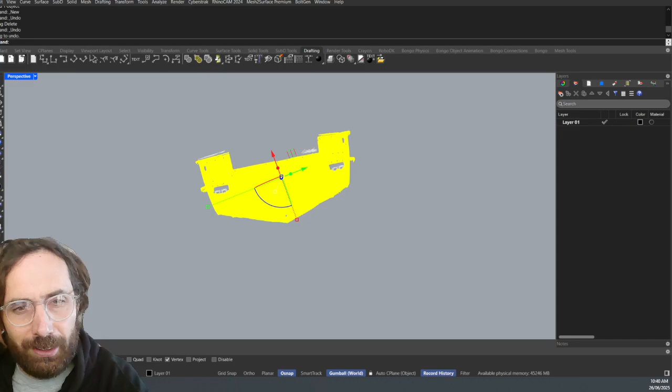So I'll make my image a bit smaller. I just figured out how to do that. There we go, maybe you don't need to see me at all. I don't know, I'll go really small. Maybe I'll just disappear altogether. There we go, how about over here?

Yeah okay, so let's get into it. Right, so the scans just come in. Is it aligned? It's not aligned in any direction.

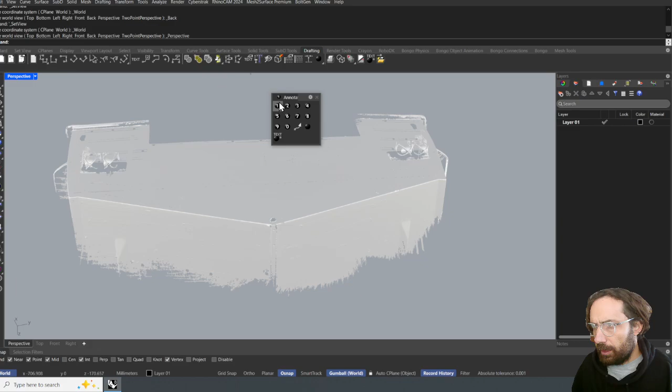So what we're going to do first is my old 3-point alignment trick. Now I have a video just on this, but I'll go through it with you. So we go drafting tab, we get these annotation dots, and we find what we think are 3 flat areas on the scan, snapping to vertex.

Then we select the whole thing, and look, I normally type this kind of thing in, but let me see if I can find it in the help menu, and we'll also get the help happening over here dynamically so you can see what command I'm using. There we go.

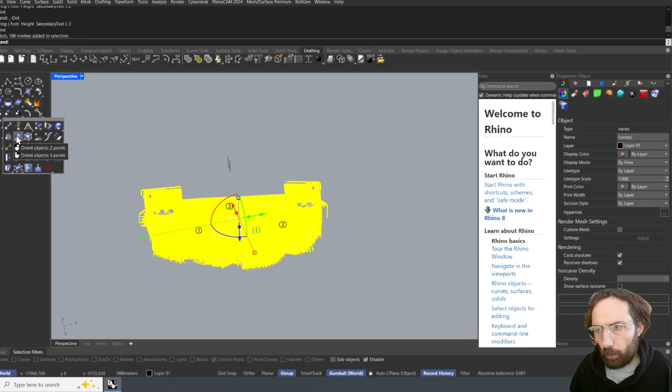Right, so I'm pretty sure it's in the transform, and it's orient objects on surface. It's this one, orient 3-point, right click. So orient 3-point, and we want to snap to points. Points, there we go. 1, 2, 3.

Now we'll go into front view. Well look, it's the back of the boat. I normally like to align things front to front, back to back, but because this is the whole job, we'll go front view. So now you select the project.

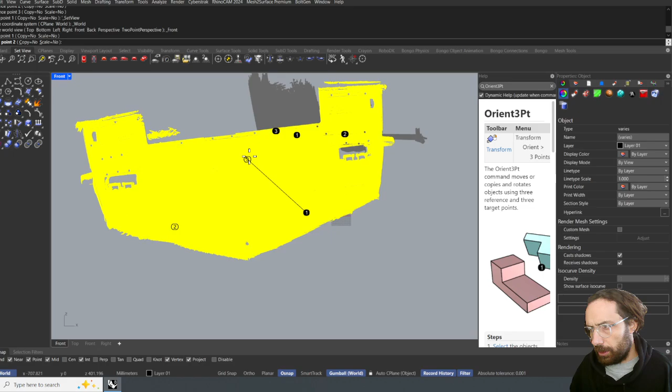This means we're projecting those 3 points onto the construction plane. So, point 1, target point 2, I think it should be over here. This will make sense in a minute, and target point 3 there.

Okay, now hopefully that back plane, the computer's just processing for a second. Hopefully that back plane is going to be completely flat to the back of the transom. The fact that it's rotated at that weird angle is no big deal, because we can do a gumball rotation.

Well, it's still processing, just processing that movement. And while that's happening, we can't do anything, just gotta wait. I'm gonna pause. Okay, we're good.

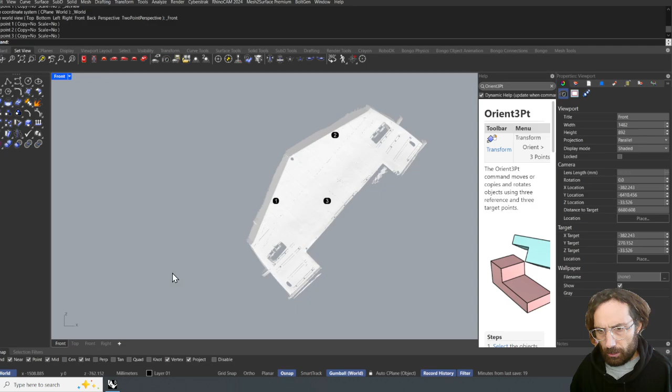So that's taken place, and now what we're gonna do is we'll use the rotate command, rotate 2D. Select the object to rotate. We'll click on the mesh. Okay, we've got selection filters. There we go, so we'll click on the mesh, and actually we'll box select everything.

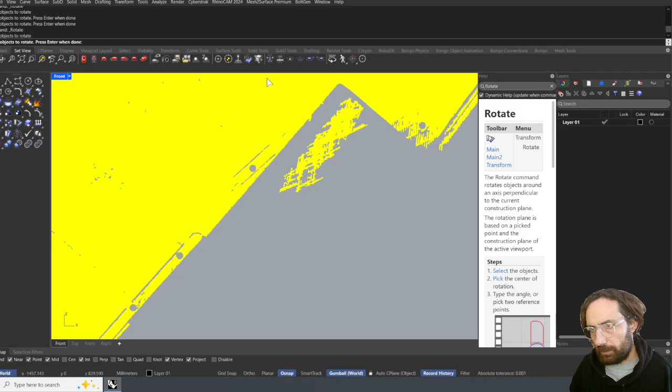Rotate 2D. Select objects to rotate, press enter. Okay, I'm going to press spacebar because I'm a rebel. Alright, and pick 1 point there and 1 point there. And now I'm going to rotate it around. I'm going to press the tab key and snap to straight plane. Okay, so now we have the back of the boat looking close to how we want it to be. Just let the computer think for a second.

I think okay, so we'll select all this again, and I'm gonna get the move tool, and I'm gonna click on that point there, and I'm gonna type in 0, 0, 0. Press enter, and now that scan has moved to the origin point of the file.

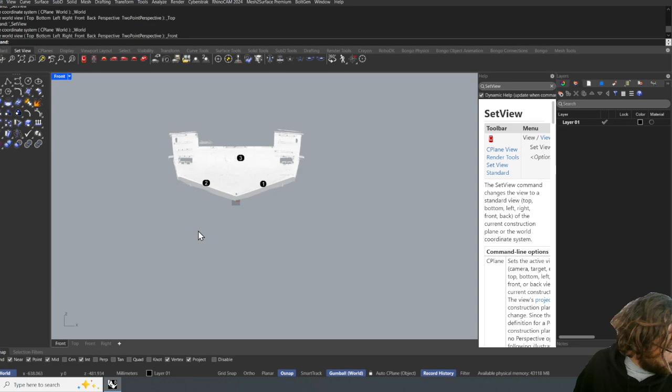Okay, so that's been moved, and now we have a look in top view, and we can see it's relatively straight. Front view looks as though I might have gotten it the wrong way around, so that's fine though, because most importantly it's flat. So I'll select everything and gumball 180 degrees.

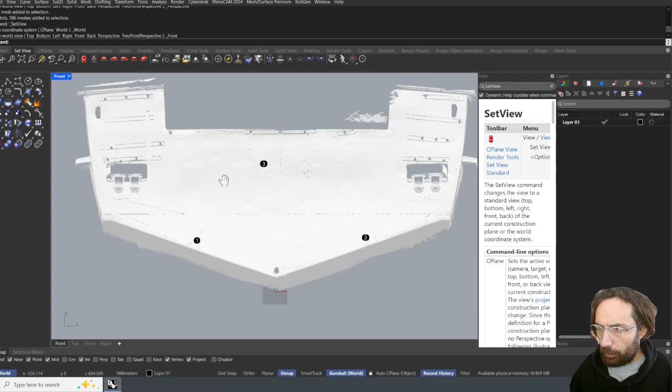Just let the computer do that. Now, why is the computer taking so long to perform these operations? It's because the mesh is quite large and it has a lot of vertices and mesh wires to move every time. So let's take a look at this.

So how do we assess how large the mesh is? We click on the mesh and run the command reduce mesh. Look, even if you're not going to reduce the mesh, this is a great tool because it tells you how many polygons are in your mesh. And as you can see, there are 5,606,865 polygons. Now, that's a lot.

So every time we move it, my computer is moving 5.5 million points of data. So that's a lot. Look, a scan like this, really, it could be under 1 million. So we're going to click on reduce by percentage, and I'm going to write in 75%. Maybe we'll even go 80%.

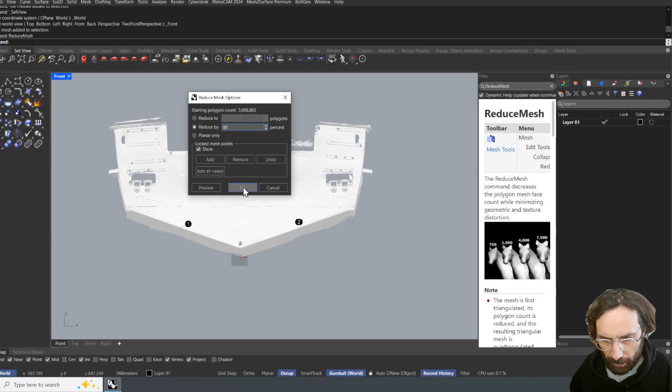1.1 million. The only problem is this is going to process for a while, but I'm going to hit OK, and then I might just pause the video while that processes.

Hey, just checking in, unpausing the video, we're at 16%. So we'll keep going. You can see up here in the top left corner, it gives you a percentage bar. When that reaches 100%, well, it isn't over because it tends to take another minute or two.

There are other programs you can use to reduce the mesh that are quicker. But Rhino does a good job, and it just takes a bit longer.

So we're at 85%, and I got a bit cold while we were waiting, but I thought perhaps we could just review this together, which is basically the Rhino help file.

This is the option we did, reduce by percent, which specifies a reduction by a percentage of the starting polygon count. Locked mesh points - reduce mesh lets you lock mesh points, and reduction will not alter those points. Oh, I didn't know that.

So you can actually add points that you don't want to be reduced. Well, that's pretty interesting, we should have a play around with that. Oh, and there's accuracy. This is very interesting - to access hidden command line options, type a hyphen in front of the command name. Well, isn't that interesting?

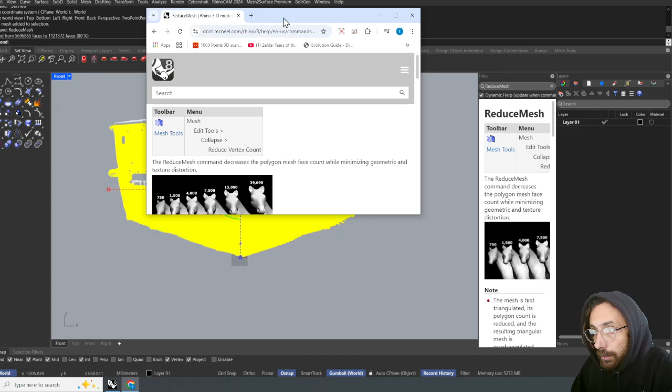Well, it's done. You can see it's highlighted yellow, that means the mesh reduction is complete. I'll click off. Now, if we run the command again, you can see we're at 1 million points, which is a fair bit better.

Now I'm curious about that. So, reduce mesh, and then what do we do? A hyphen. Oh, it tells us over here - reduce mesh. Okay, so now we type a hyphen in front of the command. Oh no, in front of, like, before the command. Okay, sorry, I'm being a bit of a beginner here.

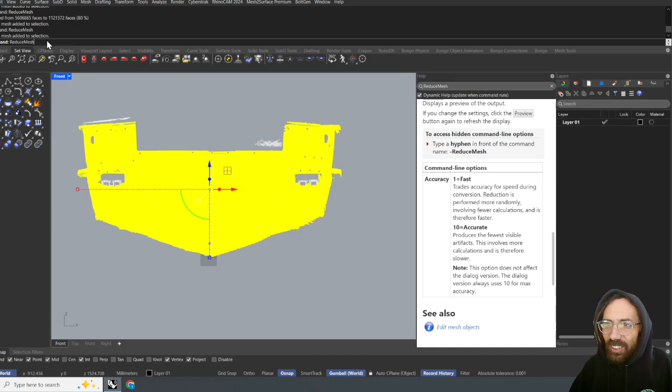Okay, hang on. Oh no, I've nudged the mesh. Uh-oh. I do this for a living, don't worry. Okay, reduce mesh.

Oh, okay, look, so now we've got mesh reduction options, accuracy 10. So we're on accuracy 10, which involves more calculations and is therefore slower. So what if we just go to 1? We can undo this, but let's choose okay. Right, now I'll press enter again, preparing mesh reduction.

Okay, well that count's going a lot faster. But I don't know what - oh, reduction percentage 0. Oh wow, isn't this interesting?

Sorry, this is not very good content, is it? But at least we're learning something together. At least I'm learning something. That's what I love about Rhino - there's so many commands, there's commands under commands under commands.

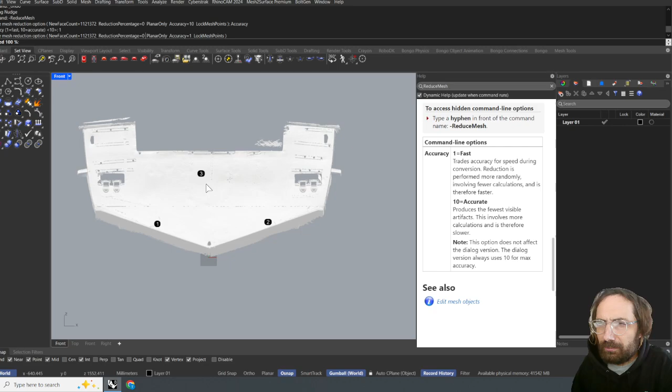Alright, we're at 100. And let's just run the command again to see what our - oh geez, we're at 224,274 points. Well, I'm a little bit nervous that we might have reduced the mesh too much, so what you can do in this instance is press Ctrl Z and visually check for any big changes.

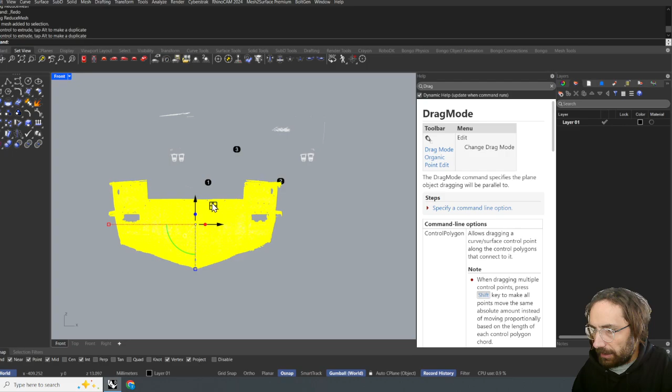Okay, that's before. After, no changes, I think we're fine. Now if we zoom in on the mesh itself, we can see we've somewhat pixelated it, but I'm thinking now we can just whiz the thing around with barely any calculation time.

So I'm going to press Ctrl Z, Ctrl Z, Ctrl Z, Ctrl Z, and again. And look, I might just undo that last reduce mesh because I don't want it to be too much reduced, and I prefer the look of that.

Okay, so we'll run the command reduce mesh one more time. And we're at 224,000, which is, yeah, it's reasonable. Look, I think that would be okay for this job.

Okay, so now we do the process of straightening up. In this view it looks okay. What I sometimes do is make a new layer and make that layer red. And while we're on layers, we should really make this layer 1, we should call it 0 scan.

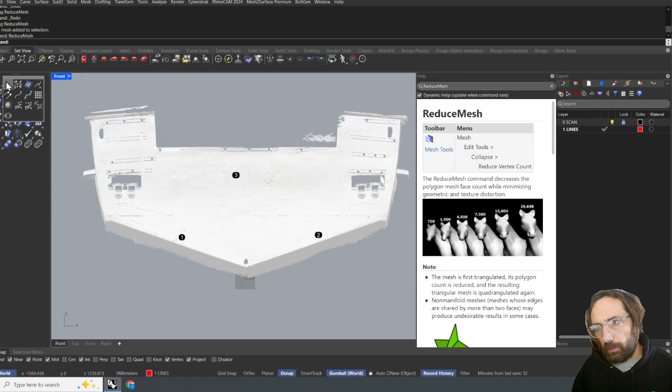There we go, and this layer can be 1 lines. But now, for want of a better term, we can lock a scan when we need to, which I just locked.

Right, and now I'm going to draw a line which is orthographic across the screen in the X direction with no deviation in the Z direction. So it's a straight line, and it's really important that we try and set the job up aligned with the X, Y, and Z plane, so that when we're extruding things, we're consistent with the geometry. So you can see from this line, I'm using the line to assess the straightness of this transom rebate here.

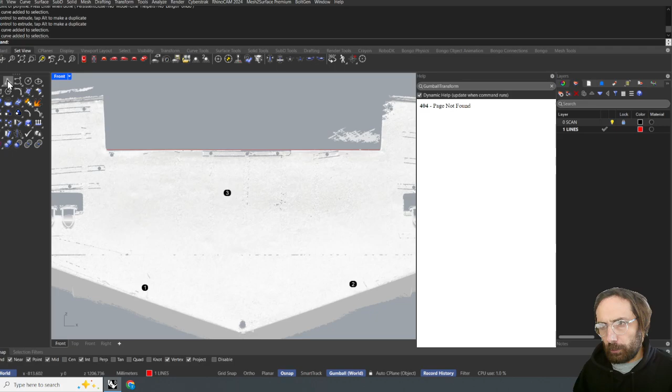Now you have to remember this was a handmade or hand-modified boat, most likely, so you have to start using your judgment. Not everything's going to be perfectly straight. For example, you look at the angle of this here against the angle of that there, I can see they're different, but that's where a bit of human judgment comes in.

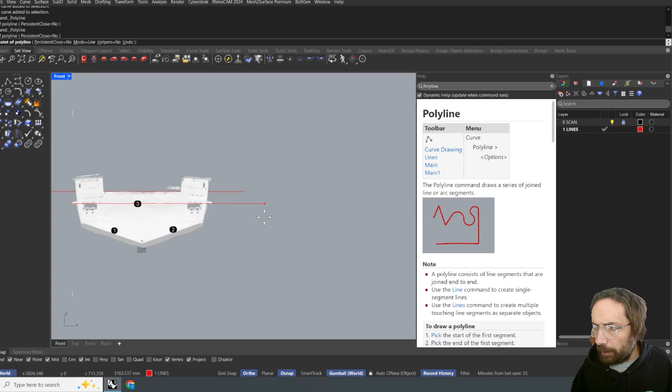Maybe we can assess these two as well. So if we go to, like, the bottom of that rad there, come straight across. I'm holding down the shift key and pressing tab, which means I can let go, and now this line is constrained along the X direction. And look, that looks like it's in about the same spot. That's pretty good. So in front view we're good.

So now I'm going to go top view. Right, and the same question, how straight along the X-axis is our mesh? So I can use the same line and find the line I want to assess against, which I'm going to use this bottom chine. And I'm just moving along.

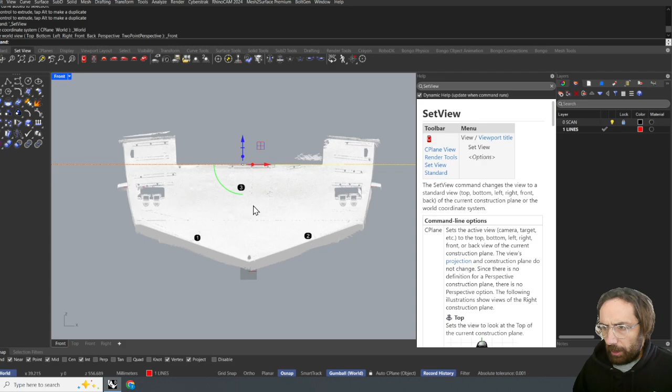It's really a decision-making process that the CAD operator has to do. It's something you got to decide. It's a decision that you have to make. A lot of people think that reverse engineering is like automatic. It's not. It's a chain of decisions, and each decision leads to another decision, and that's like the foundation.

So I'm just aligning the C-plane to this back point here. Each decision is the foundation of your later CAD work, and you can have a shaky foundation. Like I had a job recently where it had a twisted center line, and I aligned it somewhat offset, and we completed the job, but it caused a lot of unwarranted issues had I spent more time simply setting up the scan.

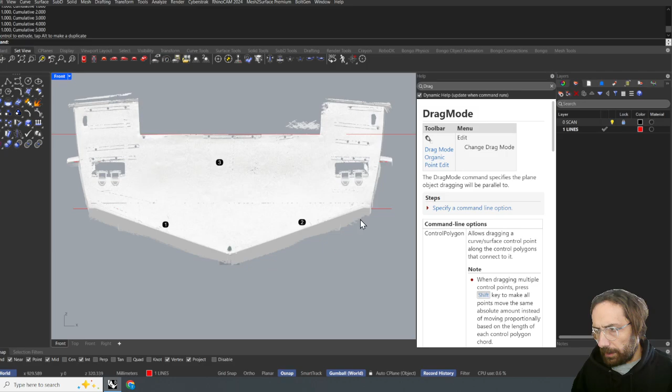Right, so I've just drawn a line across there, and I want to see it, so I'm pulling it that way. Okay, now I can see it, and typing in C-plane, I'm going to align my C-plane, turning off project, align my C-plane to there. So now when I draw another line, it's not going to be behind the mesh, because I want to mark a center line.

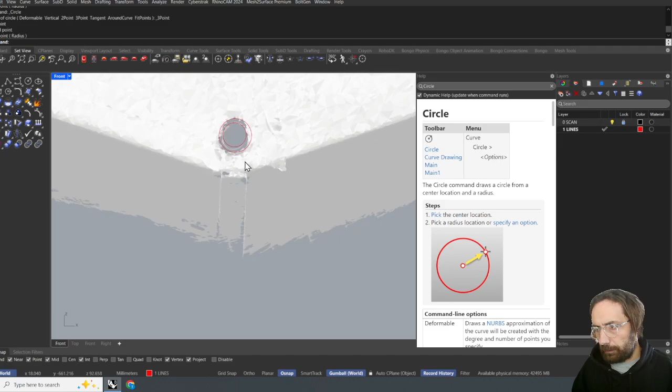So we've got a circle here, so I'm going to draw a 3-point circle. Wow, I don't think that's very good. I'll draw another one. We don't have a lot of data to go on, but again, this is where the judgment comes in. This is where the art of reverse engineering comes in.

We got a strip here, which is a keel strip. We can draw a line straight up there. I'm holding shift, so that line is perfectly aligned along the Z-axis.

Okay, now these guys, I'm going to use the concentric align centers, and I'm going to pop them on that line. And I'm using my arrow keys with a 0.1 increment and the nudge activated, which I'll show you how to activate because it's super helpful.

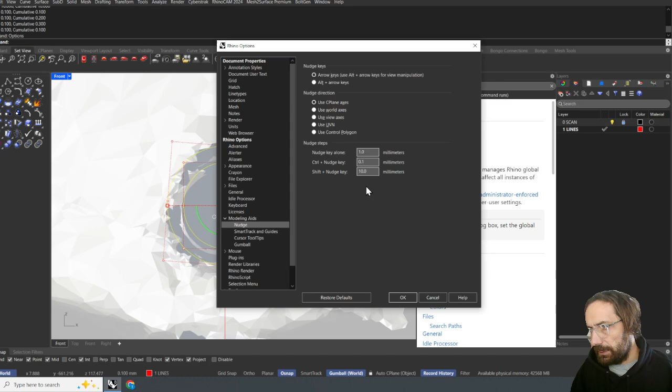So it's in modeling aids, nudge, and you can have your arrow keys set to these increments. See, I've got control and an arrow key is 0.1. Now this can also be a problem because you can accidentally move things, but it's a cool tool.

It's a great tool. So now what I'm curious about is I want to draw a line from here along the bottom of the hull to here. Now I'm going to mirror this, and hopefully they're about the same. And if they are, it's going to make... I'm going to turn off vertex snap, and I'm going to snap to this line. There we go.

Alright, look, we've got a bit of a misalignment there. So does this mean that my center line is out, or does the boat have a bit of an unusual shape on it?

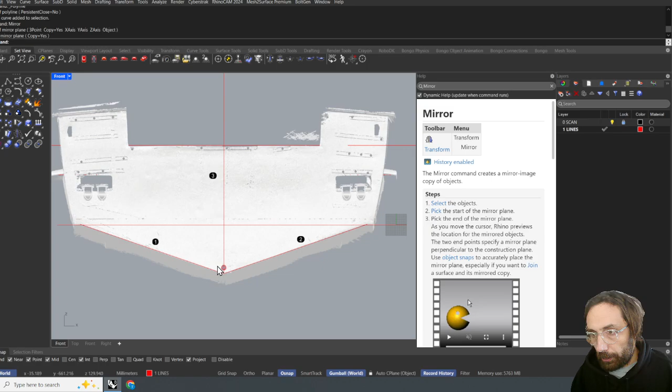That's kind of what we're going to look at. I'm going to go to drafting and take a measurement from here to where I think the actual end of the transom is, 4.89 millimeters. Now look, whereas on this one we're perfectly aligned, that's telling me that something on this real life object is not straight.

To be honest, in the real world, when you're dealing with scan data and real world objects, the challenge is you're trying to draw CAD on them, and objects in the real world are naturally going to be bent out of shape by physical forces, whereas in CAD everything wants to be perfect.

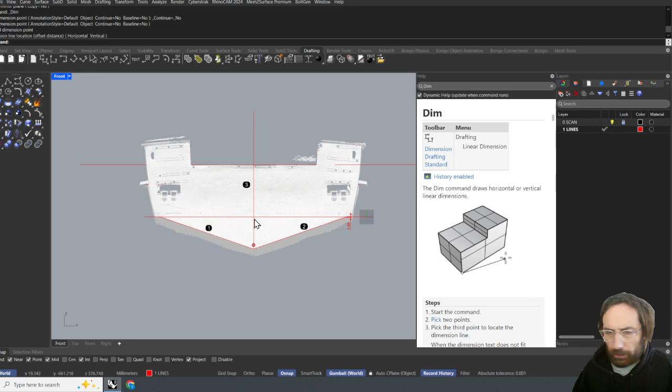That again is the game of reverse engineering. It's trying to align those two, and if you have a physical output, which reverse engineering typically will have, the challenge is weaving between the perfection of the digital and the imperfection of the scan, which represents the real world, and trying to shoot a line through the middle. It's a constant decision-making process.

So what do we do here? I'm wondering if we should rotate the hull a touch so these are more aligned, because at the end of the day we're going to be making a pod that goes on the back here. So I'll find another line to check, which I think will do a 3-point arc along here.

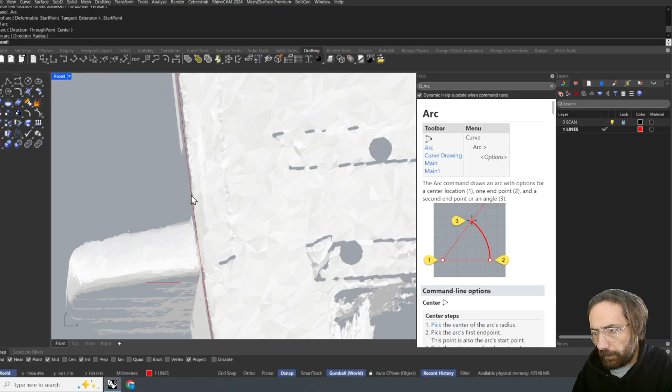It could be that my center line is out too, it's hard to say at this stage. This is the investigation phase. So I've got a line here, click on the line, and I'm going to mirror it, using this here. Okay, it's slightly further over. Oh no, we're about the same. Let's check some measurements.

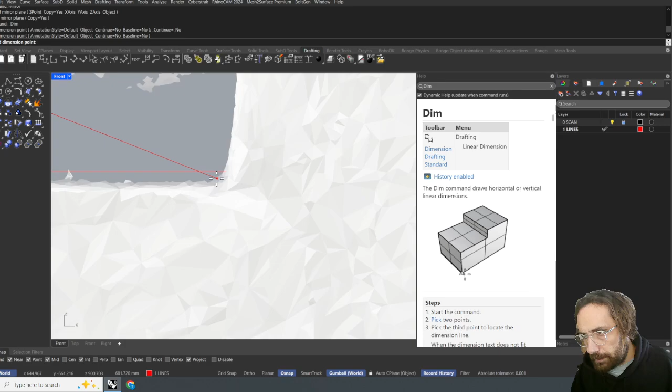Let's go a measurement from here to this bottom corner: 637.75. And we'll go from here to this bottom corner: 632. Right, now that's pretty interesting, so we're plus 5 mil there. Okay, so let's go from here to here.

1150, and we'll do the same, going from here to here: 1153. Okay, so this is interesting because we have a higher number here and a higher number here, which indicates a bit of a twist.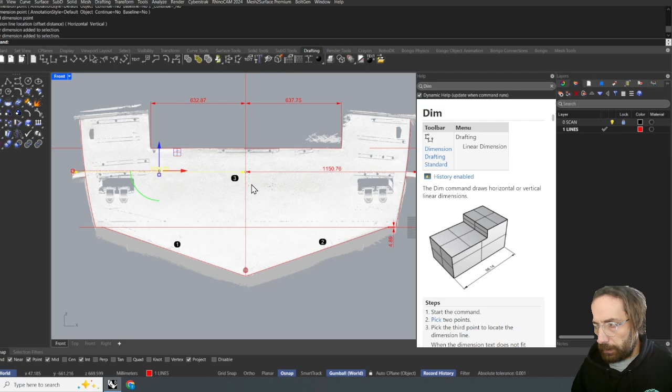That said, these planing strakes, I don't think they're really something we should be making critical measurements of. So we'll go again, from our perceived center line to this bottom corner: 999. And from this perceived center line to this bottom corner: 995.

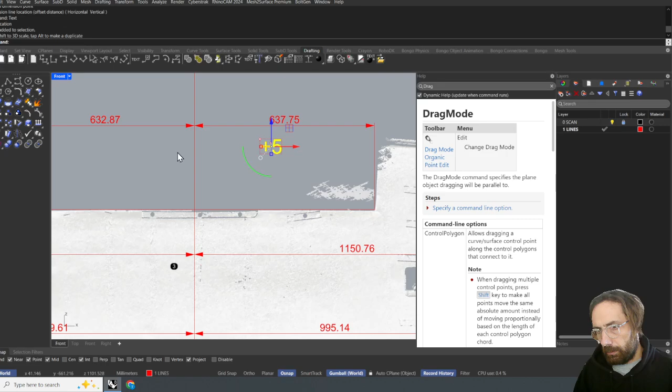Okay, so I'm going to bring up some text. I like doing this, I've got two monitors so sometimes the pop-ups go into the other monitor. Alright, I'm going to put a +5 here. This text, we use to mark it, we'll just round up to +5. Right, so we're +5 here.

Now we'll come down here, we are +4 here. So this one is 4 higher than that, and about 5 higher than that, so that's indicating a twist, which is, to be honest, typical for a boat.

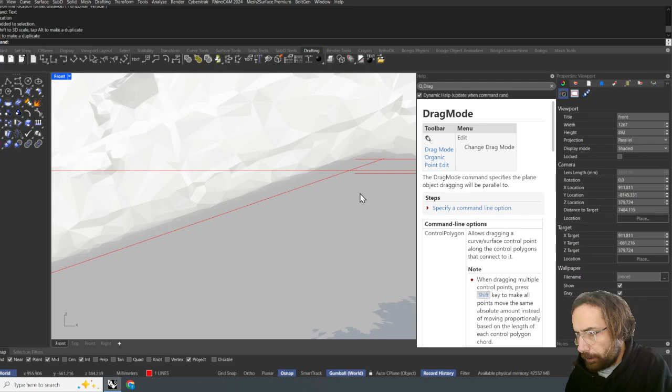Now, I have to build a transom extension kit. I don't want to build an asymmetric kit, so what do I do? Is my center line plumb? I'm thinking this is indicating that the boat, I don't have the boat set up completely plumb.

Or even if this line is, this is a line that's straight along X, so I guess there is a bit of a gap there, but it's touching there. It's touching, it's pretty consistent. Okay, I think I'm going to rotate the...

What happens if I rotate in this direction? This is the Crayon plugin, which I think the new Rhino 9 WIP actually has as a feature, I could be wrong. But then again, this plugin is $20 and it's just fantastic. It works with Grasshopper too. I haven't really... I don't know why it's disappearing. It's not working for me, but it's a good plugin normally.

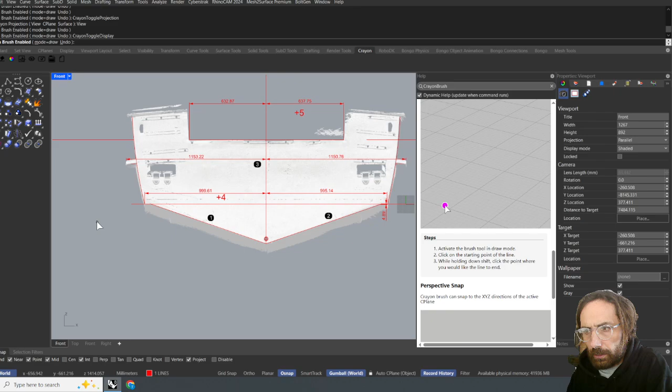Let's have a look: arrays, brush size, draw lines. I use it all the time, believe it or not, for client markups and whatnot. Don't know why it's... projection, view, toggle display. I don't know why it's not working. Okay, well alright, so +5, +4, which indicates that.

So we've got some decisions to make. We've got a center line, a perceived center line. I mean, yeah, it doesn't quite look right, does it?

Let's just double check that this line is in fact heading straight up plumb. So I'm going to click the ortho. Yep, that's a straight line. And let's just double check that this line is also pretty good. So it's in ortho, yeah, that's good.

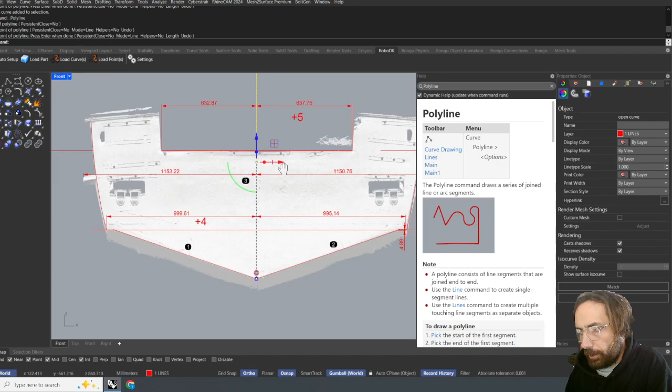So the issue is here, we use this to set up initially, whereas clearly we have a gap here and a high number here, so I'm thinking we might just rotate this mesh. So instead of clicking on the mesh, I'm going to type in 'SelMesh'.

SelMesh. Ah, I see, okay, so we've got a locked layer. There we go, SelMesh. Okay, and we'll group it.

Okay, and let's split the difference here. So what does 0.1 of a degree look like?

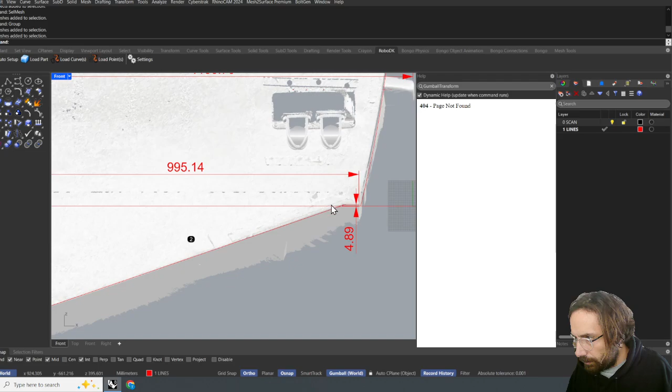That brought us a bit closer. Yeah. Okay, so 0.1 of a degree. Let's just redo this measurement.

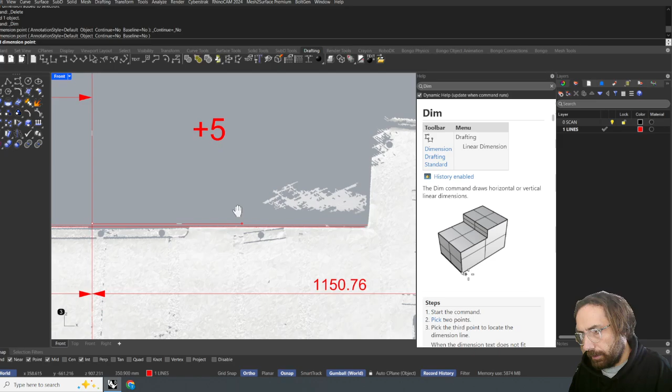From here, our center line to, let's say, well, it's hard to say, isn't it, there? 639. 634. Look, I should really take it from the vertical face. There we go. 638.

And we'll call it there, 642. 638 and 642. Yeah, we'll delete those two. Oops, I'll delete the center line. 642.

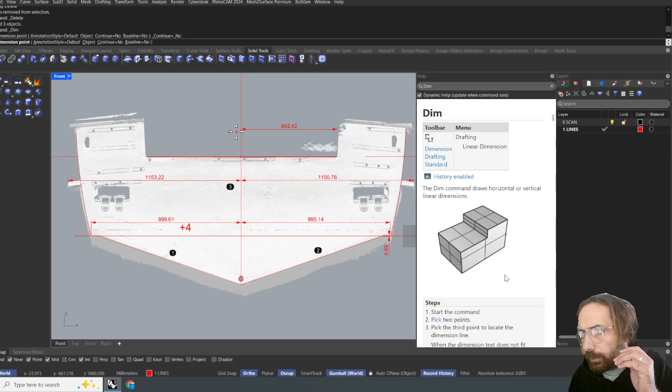637. Take another one. Call it there. 638. This is what scan data's like, you know, it's ambiguous. It's like 642. Okay, so 638, 642.

Right, we'll get rid of these dimensions. I think we'll go for this outer chime one again. We'll go to, can you tell that there about the radius point?

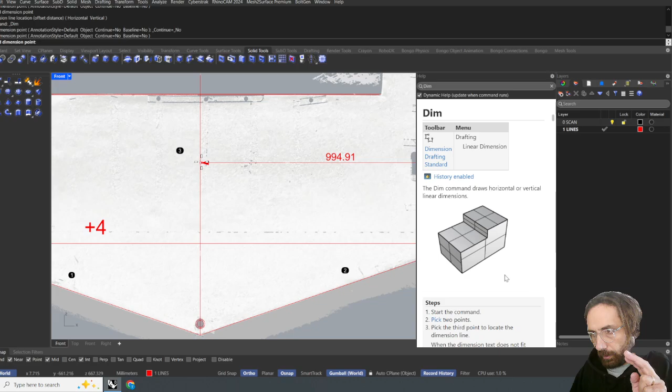994. Let's do this side. 999. Okay, so we're still plus 5, and we're still 9, 10, 1, 2, still plus 4. So that rotation didn't really change anything.

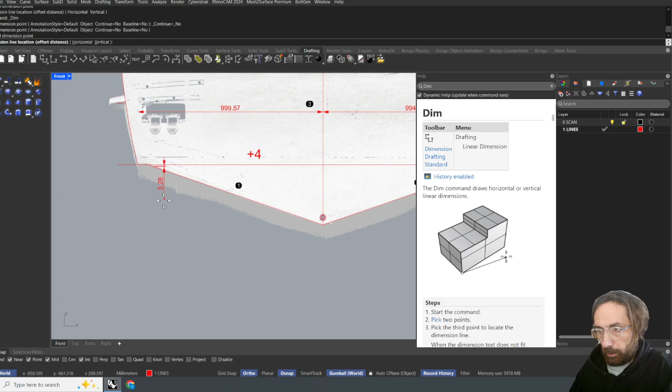Well, it did, but barely any. But what it's done is it's reduced our gap size down here. So you see, we used to have a 4.89. We'll get the drafting tool, we'll get a dimension from here to here, 3.31. Okay, let's have a look at this one. 3.28.

Look, I know this is precise, but at the same time you're going on feel. But this is just the initial setup. I want to reiterate that we're going to do more setup.

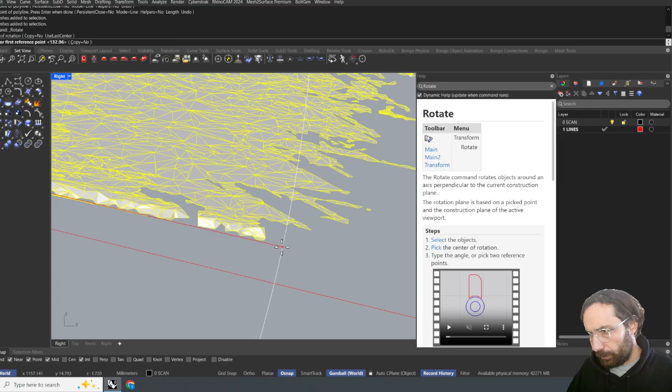So we'll take a look at this in side view now, and obviously it's heading downhill a little bit, so we'll sort that out too. I'm just going to select the mesh and run the rotate 2D command. Rotate from here to here and do an ortho snap shift. There we go. Okay, back to front view.

Now, because we're looking at it on a plane, it's basically the same, but we might just redo some of our measurements. So I'm going to type in SelDim, select dimensions, delete. And we'll get rid of that plus 4.

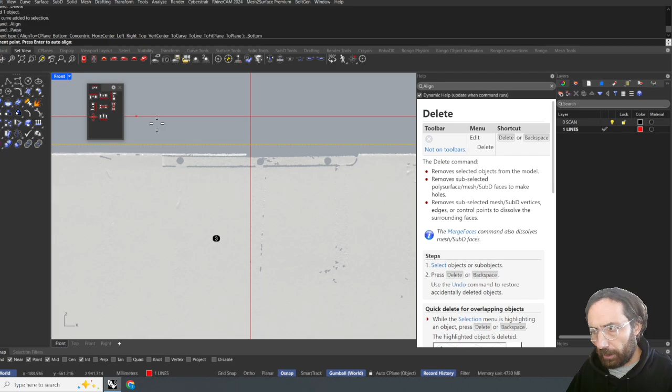We'll delete one of these lines, and using the align toolbar, bring the other one down to say about here. Visually inspect that line. Okay, still looking okay. This one, yep.

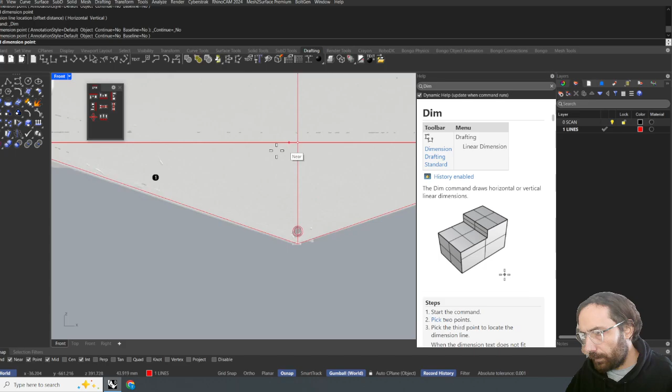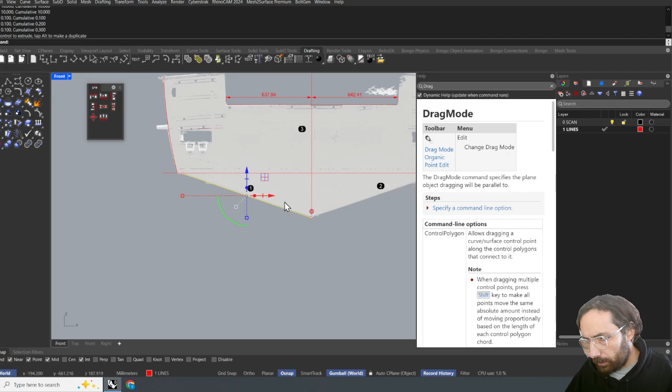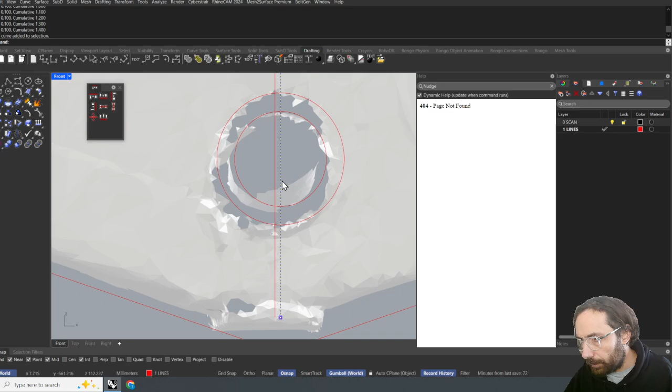Okay, and let's just have a look at our shape of our V. Okay, we'll mirror this off our selected center line. Okay, so that tells me the center line could potentially move over a touch. Control and arrow key. There we go. Mirror.

Okay, what's our distance here? Drafting... 1.73, 0.1, so we're about a millimeter out of alignment. We're more down here.

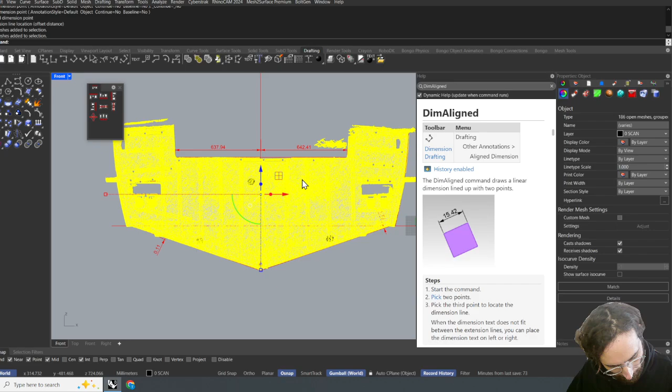Okay, so now sometimes at this point, as an extra check, I'm still just making my mind up about this, about the orientation of the scan. Sometimes what I do is I select the scan, I copy it in place, I take one of the scans and I change the color. I change it to, like, I don't know, red.

Okay, and then what I do, now they're both overlaid over each other, is I grab one and mirror it along the center line. And then I just have a look-see, see what I can see.

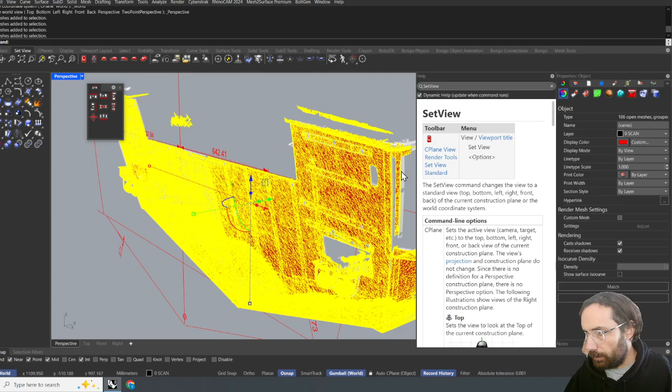Okay, did we change them both to red? No. Okay, so in the act of mirroring it, somehow we took it forward, so I'm just going to move it a little bit.

Alright, so this becomes quite interesting. So you can see these are reasonably well aligned, and if we look over here, you can see this is pretty well aligned. Well, that's a bit further over there. How are we looking over here?

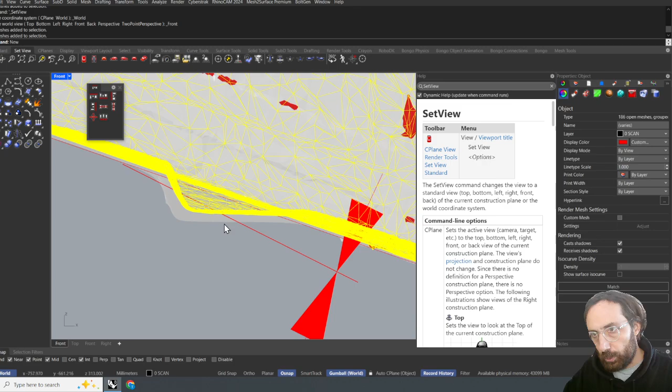Okay, what I sometimes do at this stage is I make a new floating viewport. There we go. And what I do is I pan over to the opposite side to where I'm looking.

Select everything, and again we're just making sure - look, they look pretty even to me. So I think that...

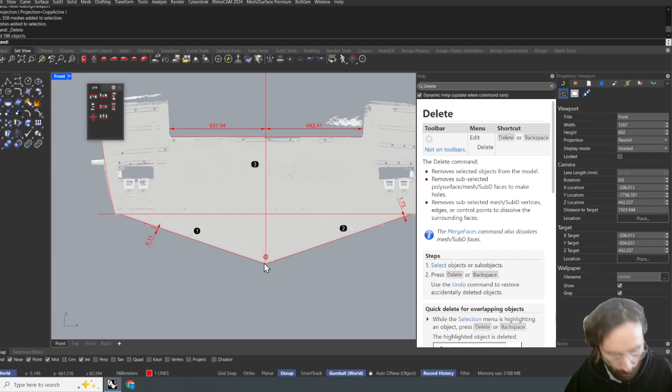I'm gonna have to say that I have this scan aligned enough to start work. I'm gonna delete the red one, which is the one we mirrored. In fact, I'm not even gonna delete it - I'm gonna Control Z just to be extra careful, back to before I mirrored it, and to before I duplicated it. There we go, so now we're back to just one scan. So there's no chance that I accidentally mirrored the wrong scan and now I'm working off a mirrored scan. I know I'm working off the correct scan.

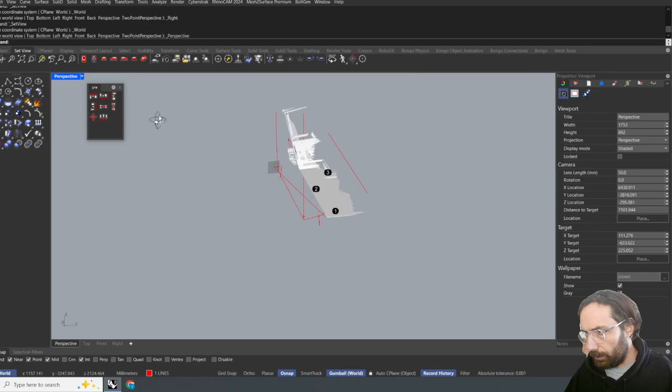At this point, for the overall tolerance of this job, I think at this stage I'm going to say that we are good. The only question mark I have in mind at the moment is how we are on our setup on the side. I'm not entirely sure having this bottom plane come straight out like this is the correct orientation. So I'm gonna keep that in mind as I move forward.

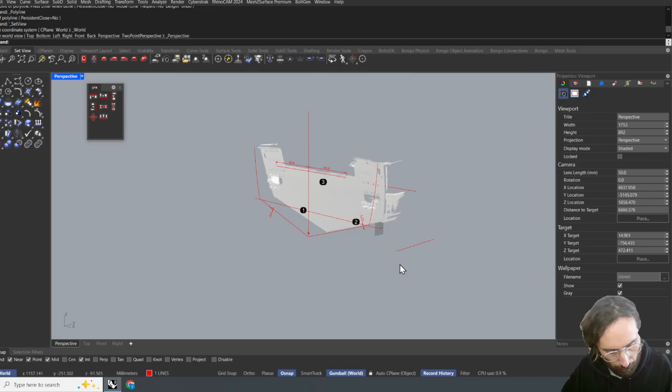I think what we'll do now is we'll bring in the next piece of the puzzle, because at the end of the day the thing we're building is relative to this, so it's okay. So I'll bring in the next piece of the puzzle. I'm going to delete the curves, delete the dimensions.

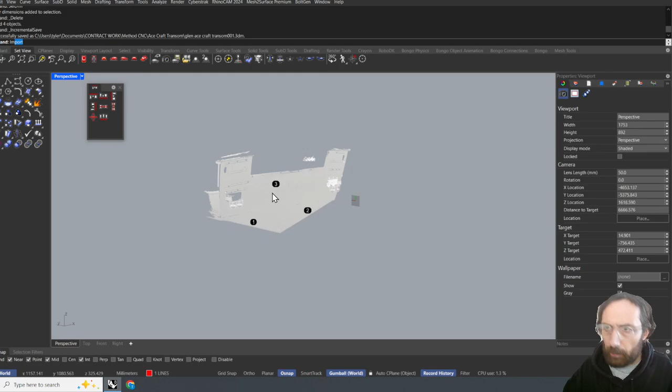I'm going to incrementally save the file, and the file size is going to be reduced quite a bit because we've reduced the mesh. And then we're going to bring in our next mesh, so we're down to 60 megabytes. So here we go, import. Yikes.

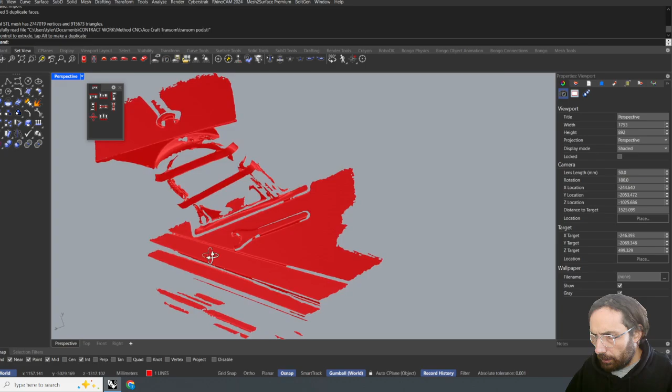Come back to here, Ace Craft, Transom pod, there we go, 44 megabytes, so it's not a huge scan. And I remember this scan, it was a stainless steel part, and we just needed the two angles - the angle that it bolts onto the transom with, and the angle that it mounts the motor at. So I believe this is the base and this is the engine mounting angle.

First up, this is really not a representation of a shape, it's more a representation of two angles. Well, I mean, of course it is a representation of a shape, but we're really using it for the angles that it represents, which are this one and this one. So what I'm going to do is select all that, and I'll group it up. I'm going to select these and I'll delete them.

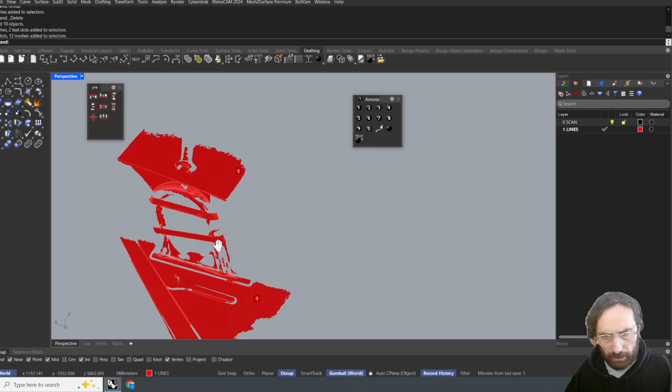Now we're going to orient - I think we should orient this, so this needs to be up in the Z direction. So I think what we should do first of all is just get this onto the transom. So what I'll do, same as usual - and I do have a link to a video where I go into some depth about this technique - I'm going to pop, I'm going to delete the dots, and I'm going to pick 3 points for my annotation dots. I'm going to select this, orient 3 point, reference point 1, turn vertex off because I want a reference point, 1, 2, 3, set view, front view.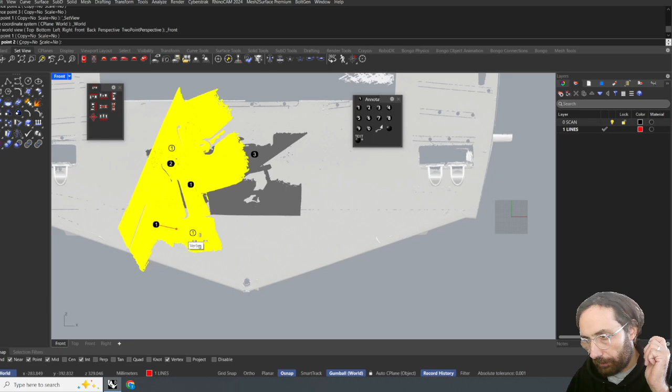I just realized a mistake that I've made. Okay, and I guess normally I would project and orient it to the C-plane, but now we're going to orient it to the vertices on this transom. So let's see how this comes out.

Okay, so that's worked. But now we need to rotate this. We want to bring this plumb - basically straight up and down. So this bar and this bar want to be straight up and down.

So I think we need to orient a C-plane on the angle of this transom. Before, when I rotated the transom, I shouldn't have done that - I should have left it. Oh, I suppose it's not too late actually. I might go back. Just to make 3D modeling easy, I'm going to rotate this - and actually no, I won't.

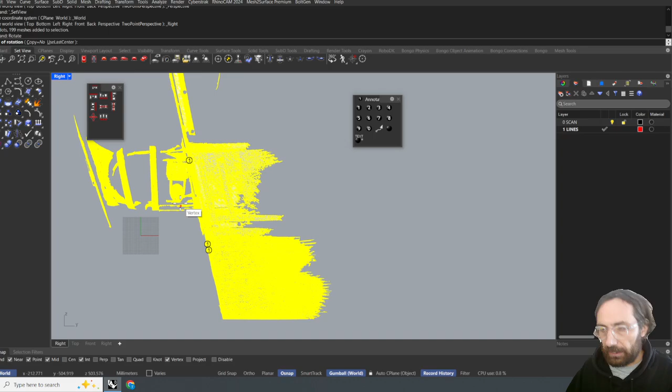No, I think we'll keep it where it is, which means that I need to set up a C-plane on here. So C-plane, 3 point, C-plane origin. Well, let's go, I don't know, somewhere close to here, and then this is going to be - oh, that was a mistake. Okay, we'll do it again.

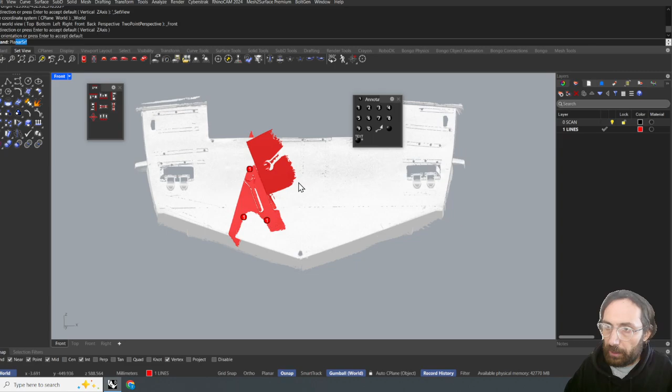C-plane origin, C-plane 3 points, 1 - we want to, we'll go front view - this is going to be the x-axis, we want to be probably here, and the y-axis there. There we go. And now if we type in 'plan', it's plan to the C-plane. Now if we click on this and we change the gumball to align to C-plane, when we rotate it, it's going to rotate perfectly on the surface of the transom.

So now how much do we need to rotate it to get it plumb? I think what we'll do here is grab this and do a section. I'll take a section through here.

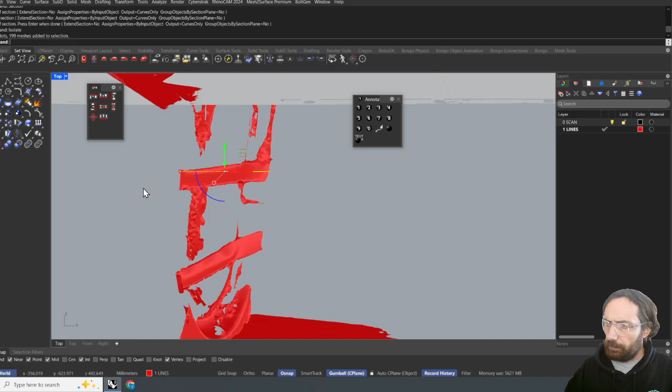Isolate that, go into front view. Okay, and what we'll do is draw a line here to here, drafting, get the angle from here to here. 21 degrees. Okay, that's how much we need to rotate this.

And now we have to be aligned to the C-plane, so I'm going to hit F7. We'll just realign our C-plane quickly. C-plane, 3 points, 1, 2, 3. Rotate this. That's aligned to the C-plane.

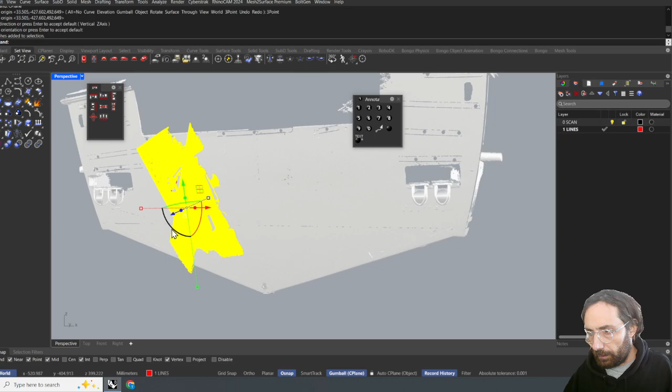And what was the number? Was it 27? Oh, so it's 21. Okay, minus 21. Okay, how does that look? Yeah, it looks about right.

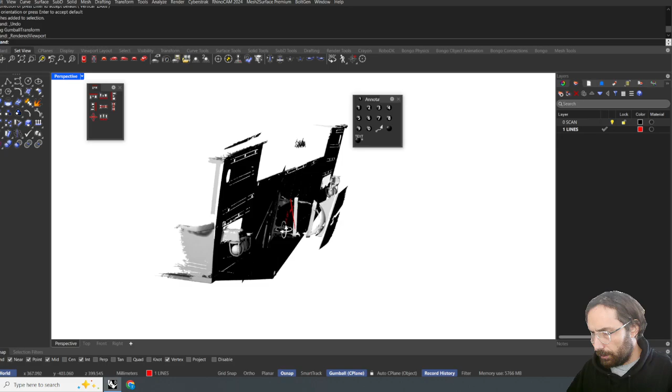Okay, now we have the correct angles, and I'm just going to call my boat building associate because I'm not sure if that should be facing that way up or the other way up, to be honest. I have a feeling that it should be the other way up.

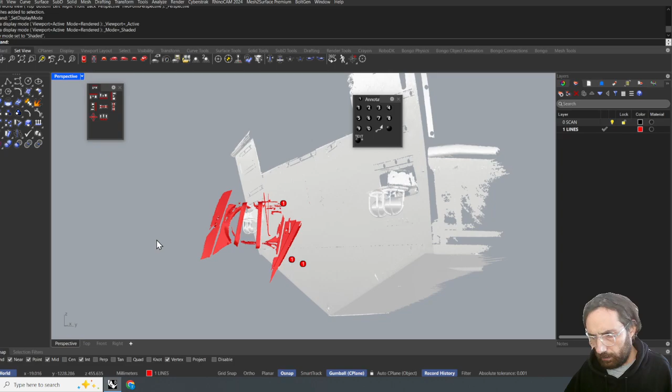Now in this instance, it's 180 degrees, right? 180. Yeah. Okay. And it looks like we've come afoul.

When we turned 180 degrees, it looks as though we must have turned on the world reference plane rather than on the C-plane. So see, when we snapped back to front view, the world C-plane aligned with the front orthographic view, and therefore the rotation gumball no longer rotates it according to that.

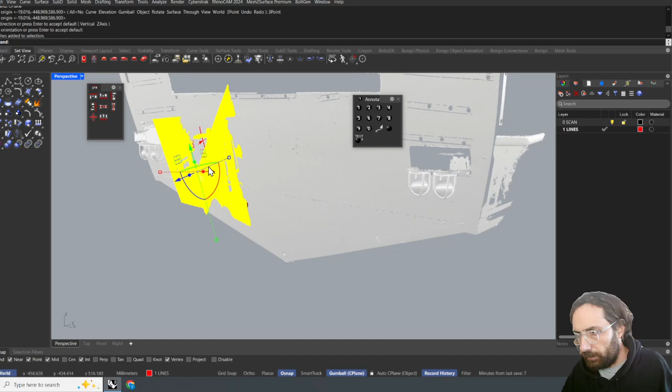So what we really need to do there is set the C-plane. So we'll do it one more time. C-plane, 3 point, 1, 2, 3. So now if we rotate this, C-plane, 180. There we go. See, now it's still aligned with the transom.

Okay, well I can tell that's not right. So I think we had it the right way before. That looks about right. Okay, so now we're going to save our C-plane, aren't we? So let me...

So we go to here and set C-plane, named C-planes, save as Transom. Okay, so now you can see it there, right?

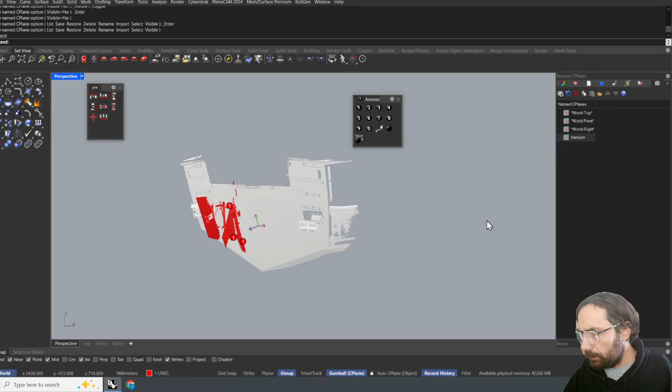Okay, so now we have world front, and transom. Right, so now I don't have to redo that every time. So now I can go plan view, and okay, we can just move this around.

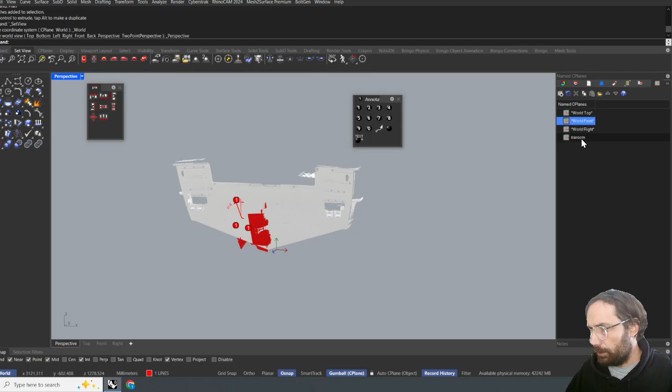So this is getting close to the point now where I have it set up that I can go on site and discuss with the boat builder the client's requirements, because I've basically got the basic elements here. I've got the transom pod that we're going to be replicating these angles, and I've got the transom aligned in 3D space. So I'm going to say that we're pretty much ready for phase 2.

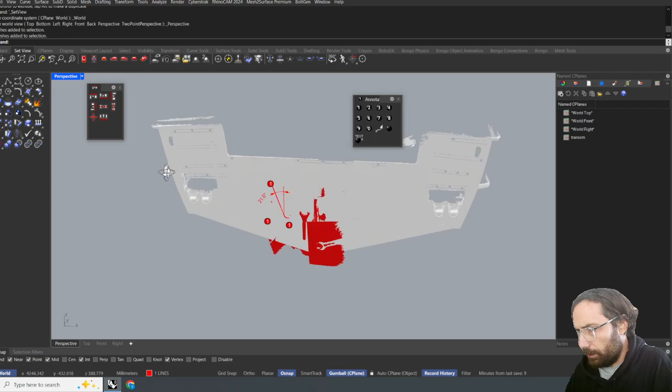So I'll finish this video here. It's kind of a live stream, I guess, and we'll continue this project.

I'm going to ask the client, the boat builder, if this is kind of the correct orientation, even though it doesn't matter because everything's relative of the scan. When we build the kit that creates the molding for the transom extension, we want that to be, well, I guess that doesn't matter either, but I'm kind of imagining we might have the kit come up against the back. Well, we'll see. We'll talk to the boat builder.